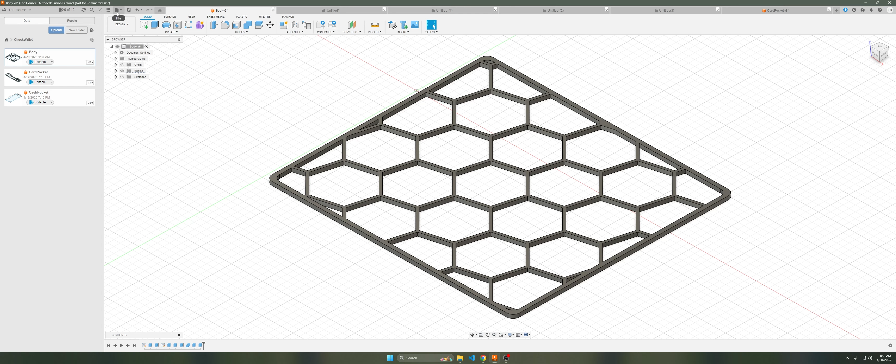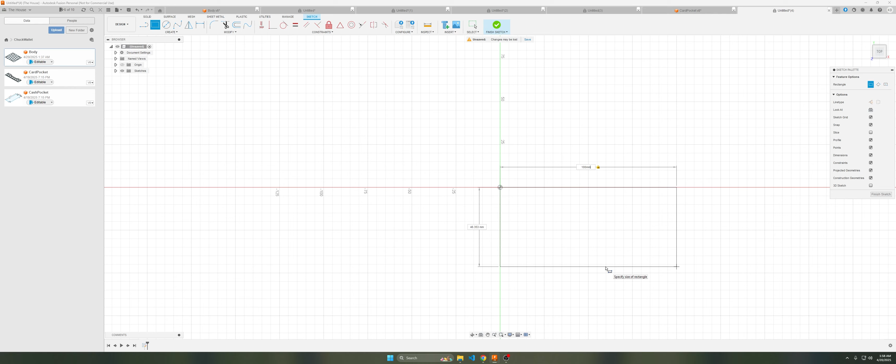So what we do is file, new design, go to the top view. We're going to start a new sketch, so create sketch, choose the plane we're working on, which is the top down view. Just to make a simple shape, we are going to make a rectangle. From the origin, we're going to go 100 millimeters by 100 millimeters, and just set that in stone.

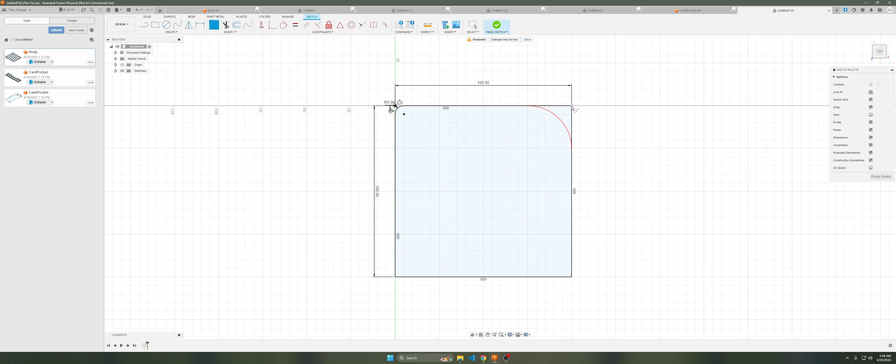Now it doesn't matter what shape you do, and just to prove that, we're going to change a couple of the corners using the fillet tool. I'm new to this too, I just do this as a hobby. So we're going to do one small corner, one big corner, and leave these two alone.

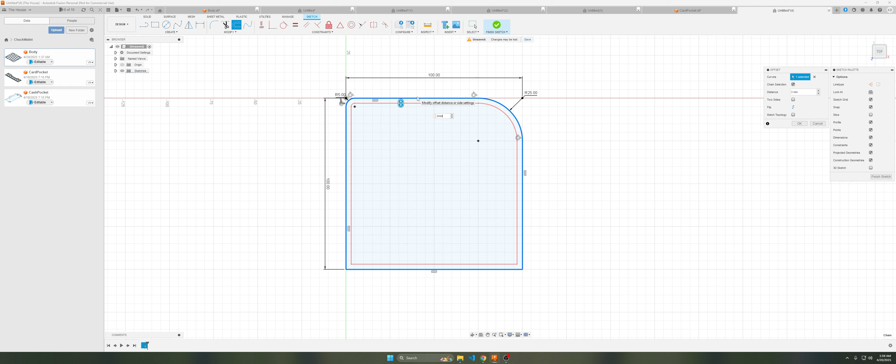What you need to do though before you finish this sketch, no matter what shape you have, is use the offset tool in the Modify tab. Click offset, then choose your curve, which is the border of your shape, and this red line appears. For the other one I showed you, that was 3 millimeters, so I'll keep that the same. This border is critical to making sure the hexagons don't go to your border and give you this weird cutoff edge.

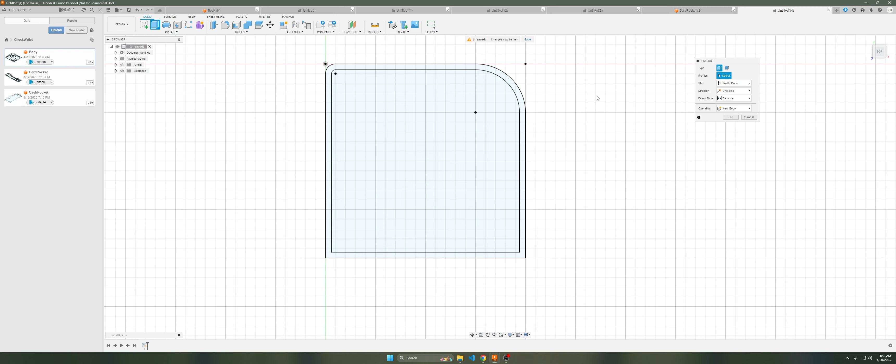Now we are good to finish the sketch. The next thing you want to do is extrude your shape, so we're going to do this main part first, the inner part. Click it and extrude that. We'll just do 5 millimeters. Make sure we can see our sketch, so go over left, drop your sketches down, bring that eyeball back.

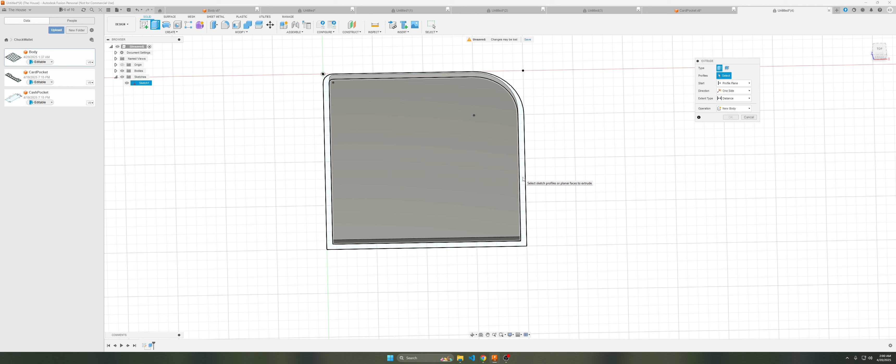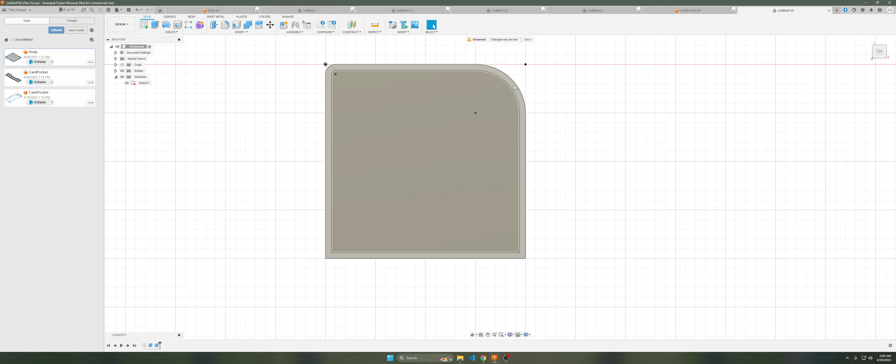Next we are going to extrude our border. This part's important, so you select your border, also select the same distance, so 5 millimeters. But before you hit enter, or even pick your nose, go over here to Operation - instead of Join, you need to hit New Body, so it creates a separate part of the shape. If we're looking top down again, we have our outer part and our inner part.

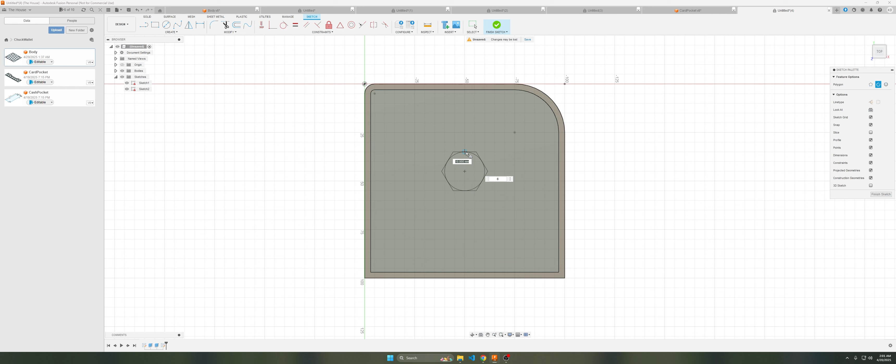Now we're going to create a new sketch on the face, top face of the shape. Hit create a sketch, click the plane. Now we're going to create our shape - go to create polygon, we're going to do circumscribed polygon, which measures from the flat side of the hexagon to the center. We're just going to do 10 millimeters. Doesn't matter which way it's rotated.

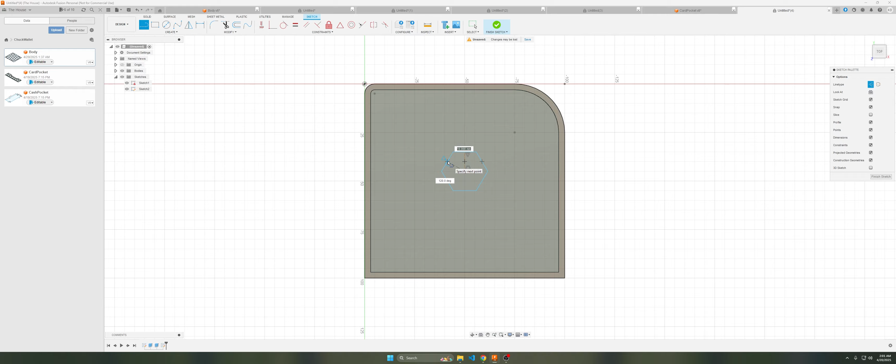Now we're going to create two lines, and this is important. Go to your line tool, go to construction, choose the center point, go to one flat side so it is perpendicular. Go from the center point to either this side or this side, just an adjacent side, also perpendicular. Now we have our hexagon with two construction lines.

Now we go back to create - we're going to do our pattern now. So you go to create rectangular pattern. The first thing you do is select all the sides. I don't know the fast way to do this because I'm a little dumb and I just do this for fun. Then you go over to directions and select your two construction lines you just made.

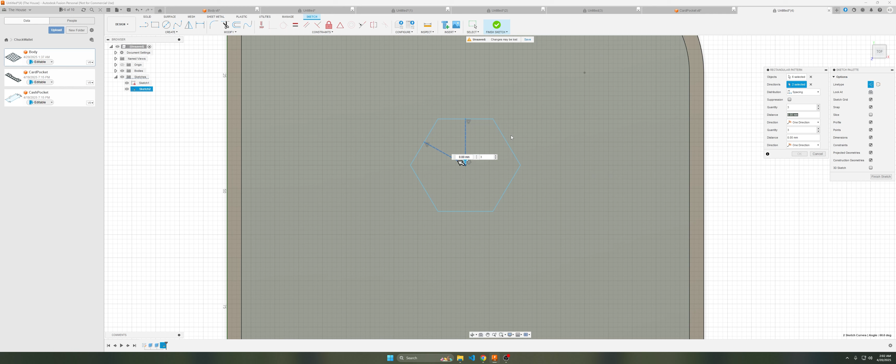You're going to make sure this distribution is set to spacing - by default it's usually set to extent, so make sure it's spacing. Now the distance we need here is twice the distance we set when we created it. So we set it to be 10, so it's twice that plus whatever spacing you want in between the hexagons. I like 2 millimeters, so we're going to do double 10 plus 2 is 22 millimeters.

You do it twice - up here, and then down here too. And you change the direction from one direction to symmetric, one direction to symmetric, and you can see how that created this 3x3 grid. So now we're going to change our quantity to fill up the entire thing.

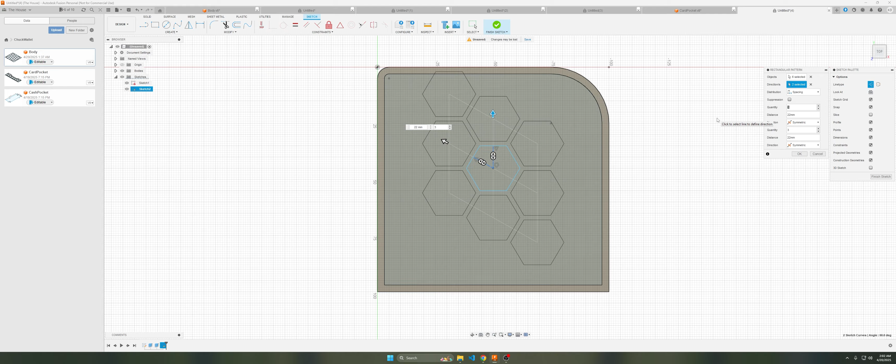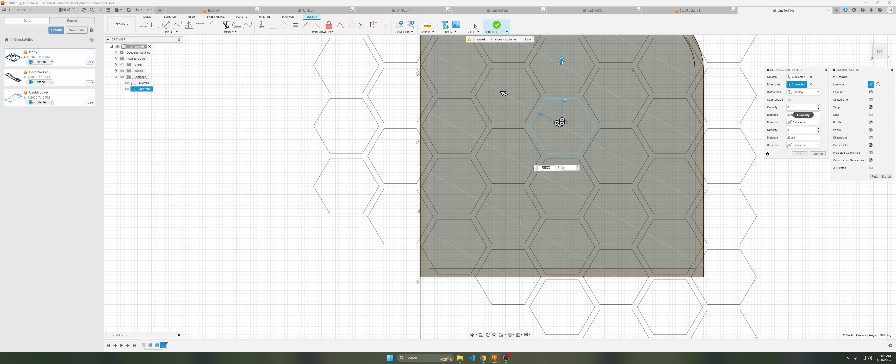Don't do anything too crazy, because if you do it a lot, like 100, that's unneeded, unnecessary. We're going to do like, I don't know, 8. And we'll go down here, do 8 again. As you can see, it doesn't quite cover that corner. I don't like that, so we'll do 9. There we go, now it covers everything, and you hit OK.

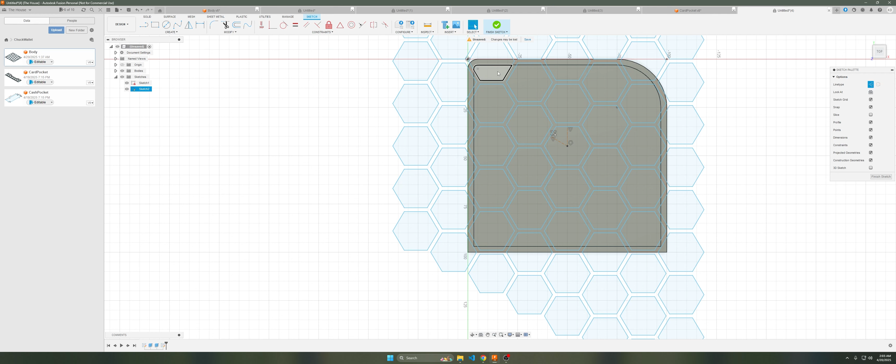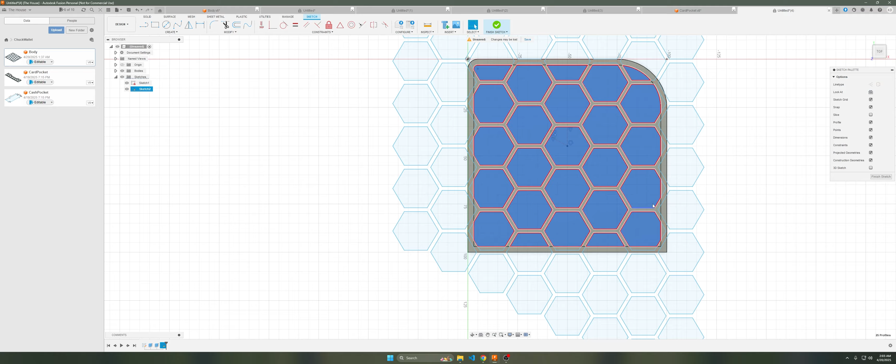Now you can see our offset tool is important, because if I select these pieces, notice how it doesn't select the rest of it outside. So now what you do is hold down Shift and select all the pieces inside your shape, not in the border, so in the main face. You're doing this, this, this, this, this, this. Then just kind of double check, because I always miss these small corner pieces right here.

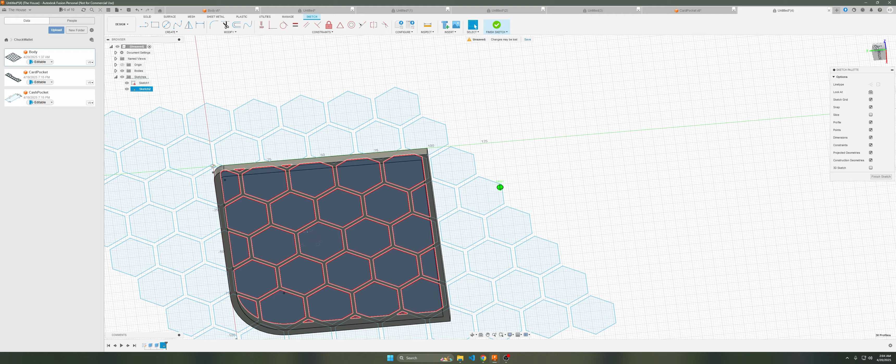Nope, I selected the line. So you hold Shift and click whatever you just clicked by accident to deselect it. And I did something crazy, see? Just going to rotate our view cube so we're looking at the top again. Finish getting these. Okay, crisis averted.

I think we're good. Now you finish sketch, and now we're going to extrude these, but in the opposite direction. Extrude - I know you can do hole and get all that done, but I don't want to mess up my 5th recording, so we're just going to do this. And for distance, we're going to do the negative of what we extrude the main piece. So we extrude the main piece to 5 millimeters, so we're going to extrude this negative 5 millimeters.

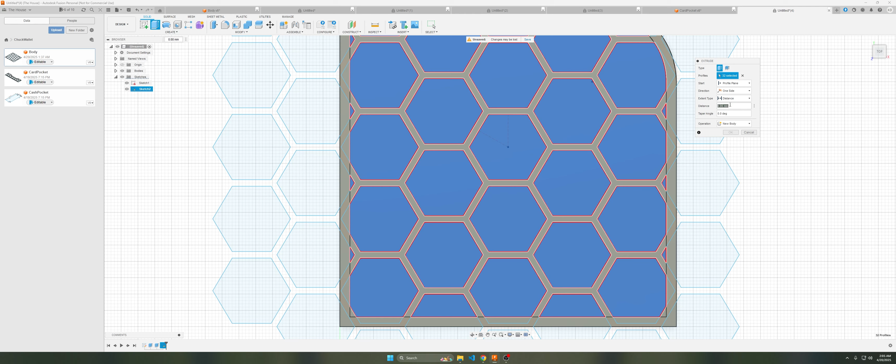Hit enter, and just like magic, it disappears. Now you're left with this shape. Notice these are still 2 separate pieces - it won't really affect anything if you're exporting it as a 3D, like an STL. But what you can do is click the outer piece or the inner piece, hit Shift, select the other one, go up here and hit Combine.

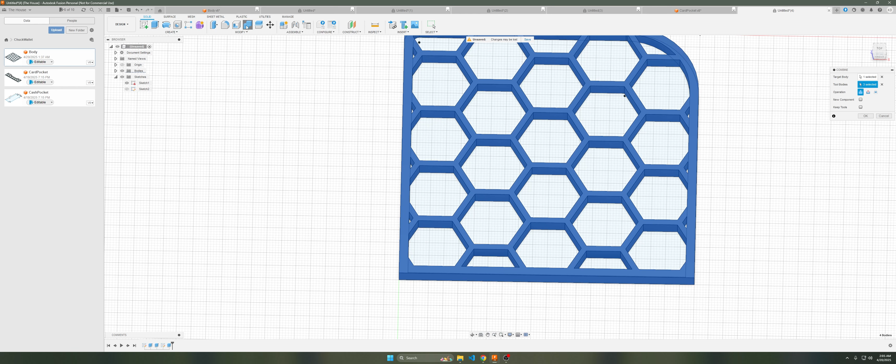Don't forget these pieces too, sometimes they don't get selected together. And we're going to combine - or it's just going to make a fool of me. Okay, I did it, it worked. I just don't know, I hit some sort of button wrong, but crisis averted. It's all one solid piece now.

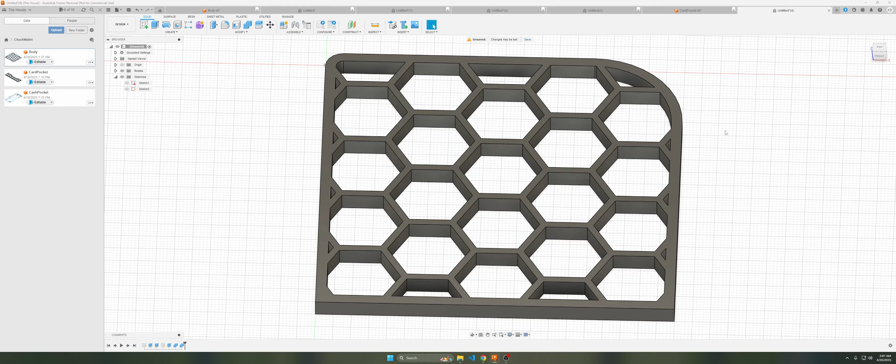So if you turn the sketch off, you can see everything is one solid piece, no lines dividing. Then you can go to File, 3D Print, then select the object, make sure it's STL binary, millimeter, OK, and it'll save to whatever folder you choose. And that's it.